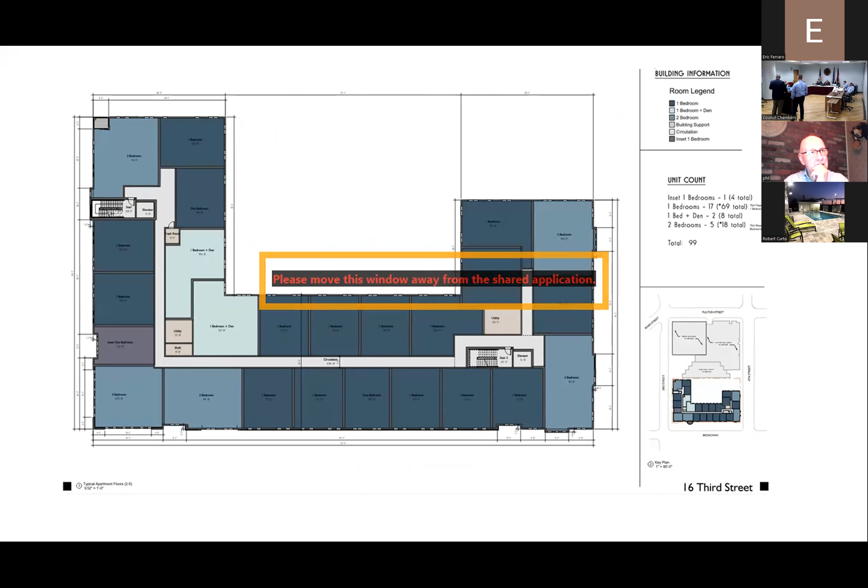This is just another view of that. Again, from the floor plan standpoint, Ken reworked the space along Broadway, and actually it extends up along Third Street as well to accommodate the farmers market in these areas. This is the same plan generally that we presented before in terms of the second, third, and fourth floors with the apartment layouts, a mixture of 1 and 2 bedroom apartments.

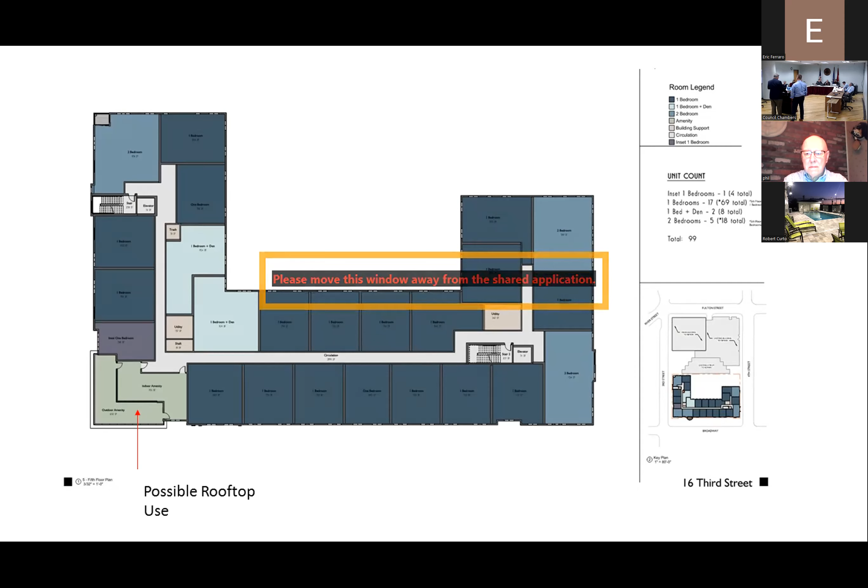And then this is the 5th floor. You'll notice that in the corner here on Broadway and Third is the possible outdoor rooftop area. It's actually shown here as a combination of both outdoor and an indoor enclosed area. That's still being played with in terms of budget and affordability, but it's something that the applicant really likes and is committed to providing in some fashion.

Again, from the enhancements along Broadway landscaping, you can see we've really added a lot of trees down in this area, kind of a performance space to go along with it, since there's usually performances with the Tri-Market. So we're talking about adding some of those spaces in here. Again, that's just surface treatment, nothing special construction-wise associated with that. And then pedestrian seating and benches along that way. But I think we really green it up from what it currently is and really engage the public in that area with the farmers market.

And I'll hand over to Ken to talk about the elevations and materials.

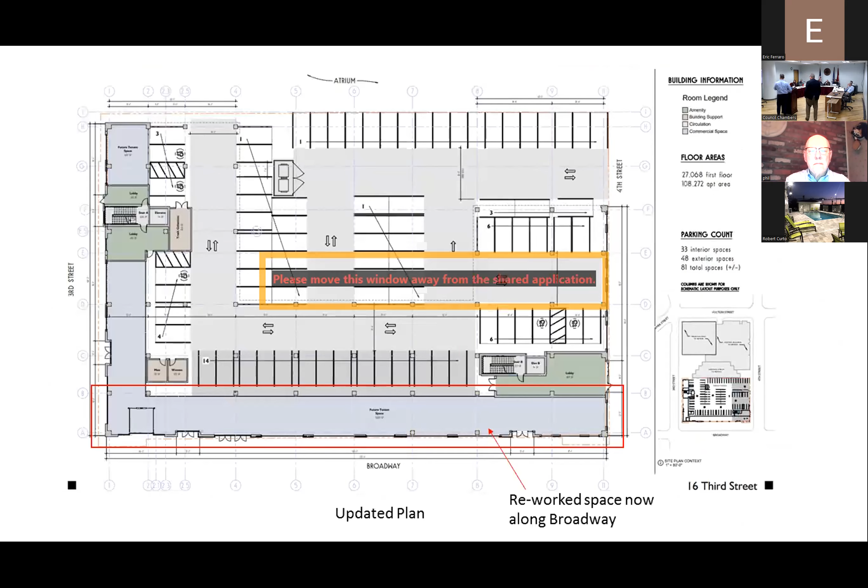So one of the things we took away from our first presentation was that nobody really liked the feel of a big building popped in the middle of the city of Troy. So we went to HRC, and after meeting with them for about an hour, it dawned on us that we really needed to break up this elevation. We said at the time we're going to make 3 buildings. We ended up actually making 4 buildings.

Then moving south, we came up with a building we're calling the Jewel, where there's a nice little decorative element on the corner with a rooftop activity space. It really helps anchor that corner. It's a modern interpretation of the materials — you have marble on the Frear building, so we have a variated color scheme of panels of grays and whites on the corner with dark bronze windows and hopefully some bronze accents.

Going to the Broadway elevation, that's what we're considering our market block type building, where all the activity of the farmer's market is really going to happen — we're hoping we can close down the street on Saturdays again. In addition, building number 4 is the one on 4th Street, and it wraps from the start of Broadway across the back along 4th Street. So that was the revised design concept versus just the one big building you saw 2 months ago.

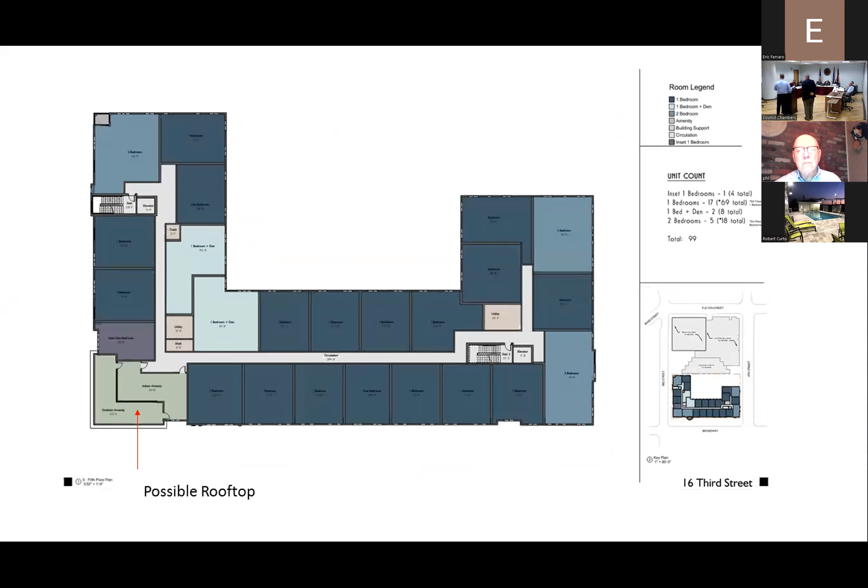It's been designed so that all the farmer's market type spaces are between you and the parking. So the only parking you really have is the entry road up in the northeast corner.

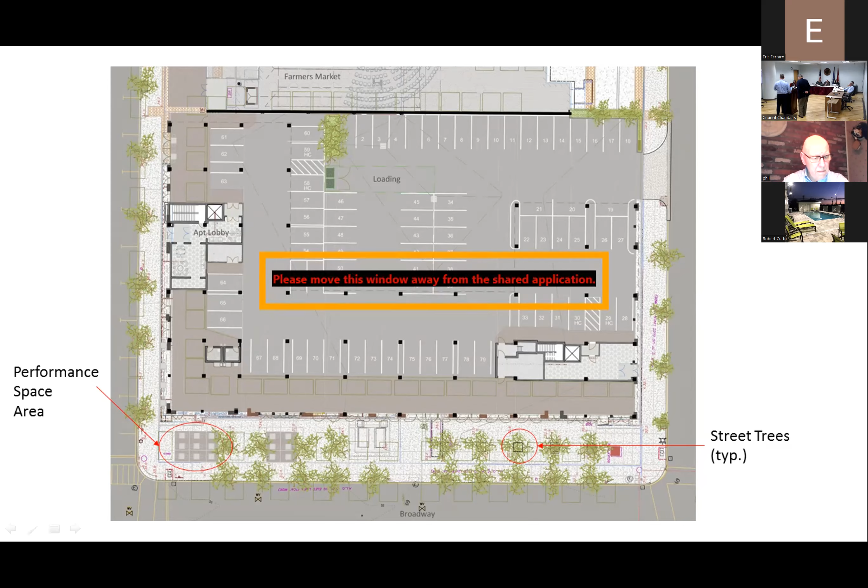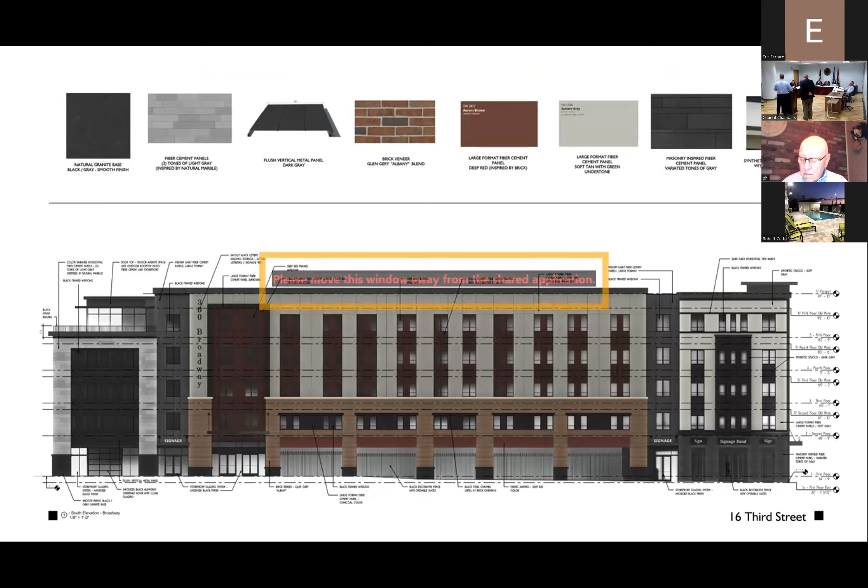So there's our market block building, building 2, the Jewel on the left-hand side. And the rooftop terrace — we're hoping, as Brian said, that we can afford it. We may need to redesign it a little bit, but right now with 99 units we're hoping we can put that in there. We like the lower elevation anchoring that corner anyway. So that's what we're shooting to do there. And you can see building 4 starting on the right-hand side of that image.

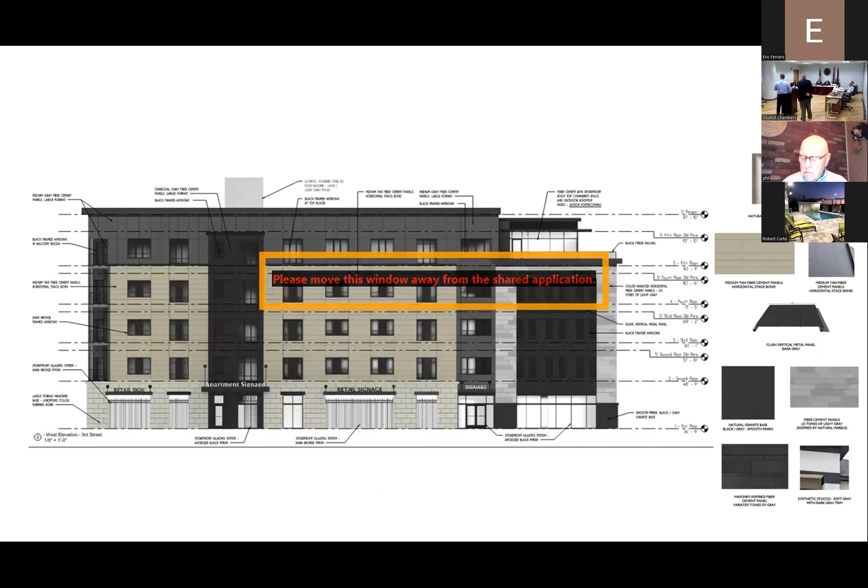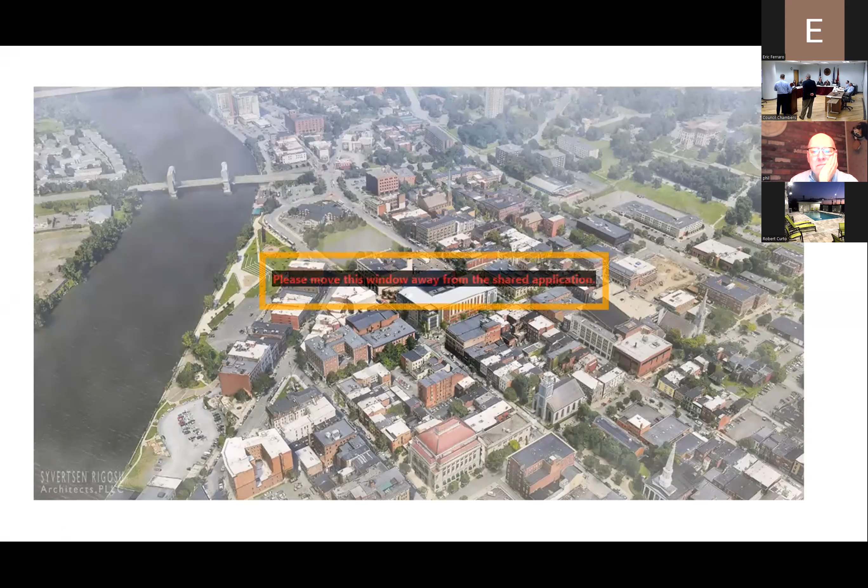Would you zoom into the center, but move it down so we don't have that yellow box overlaying the project in it? I think I remember how we figured that out — you had to share the entire screen rather than just the application, or vice versa. Well, you could also just take it out of presentation mode. Yeah, oh yeah. Fortunately. Stop sharing. Yeah.

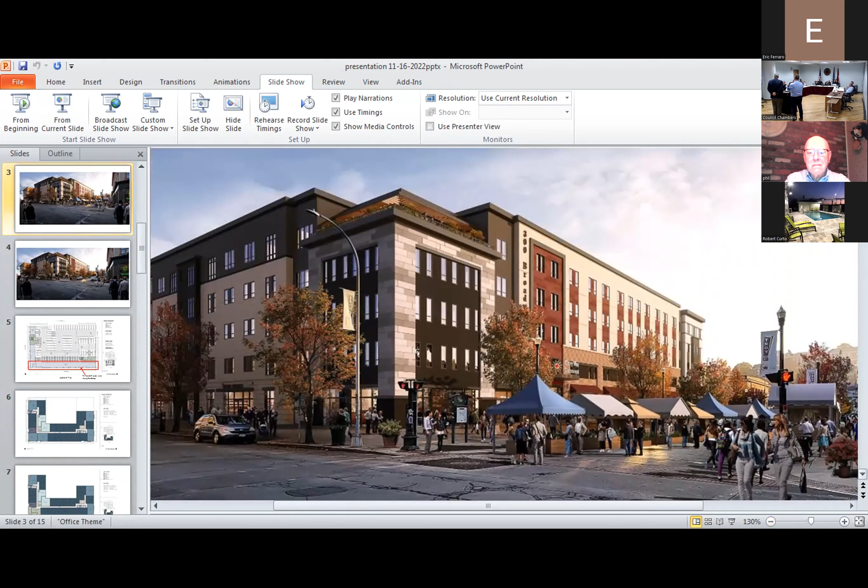The other thing I'm going to jump in and point out, something I hadn't noticed a month ago — this project now exposes... let me get the right spot. Can we go to that aerial rendering? The one we just had up? Yes, thank you. It's the south facade of the atrium.

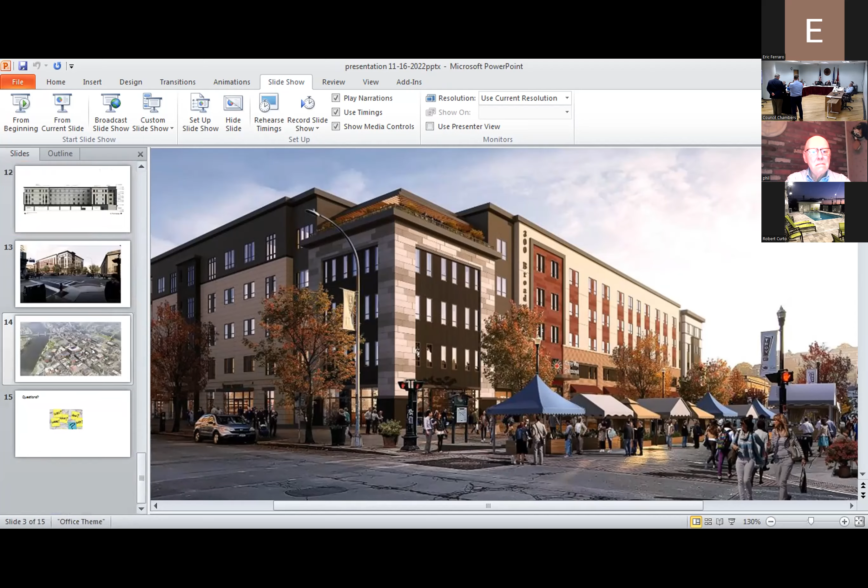The south facade of the atrium is one unrelenting facade of metal panel with nothing on it, and I think that's a concern. So that's actually on the property line. Actually, the atrium is over the property line — it's actually on our property.

But correct me if I'm wrong — you're pulling the building off of that existing wall construction. Right, so you can either leave an unfinished wall, which obviously isn't going to be acceptable, or replace the facade with something. Well, there's no wall there now — it's exposed columns. That is new wall. That's all new wall. I have to think that is not acceptable.

I don't know if any of the other commissioners or members of the public noticed that, but can we zoom into that? We talked about this in the first meeting briefly, and we didn't go into detail on it, but it was a strange thing that was pointed out, and it was a requirement.

Because of the properties — well, their argument was to put up a wall, which the city owns. But the design of what the wall is wasn't something we had discussed. Yeah, I think Brady had mentioned something about access for maintenance, or maybe Aaron did. That said, I don't think we had concluded on it — no, it's not like we're done discussing it.

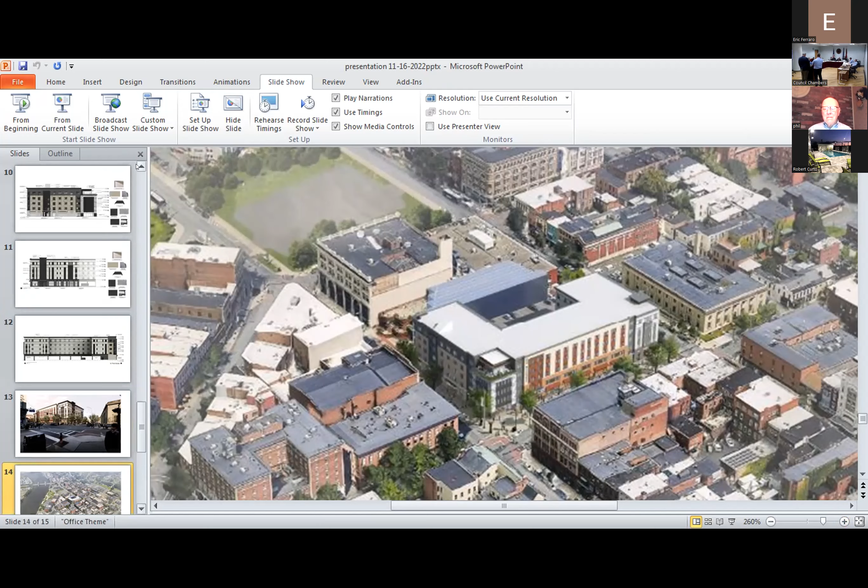What is the fabrication of those sort of bricky looking things in the corner building? Which building? The corner building—which corner? The one that wraps around Third and Broadway, the one with the roof deck. That has, hopefully, a granite or cast stone base, and then it goes to fiber cement panels above that.

Okay. I really like the way that end looks, the west edge. Yeah, this elevation is helpful. If you could just pull it or zoom in so that the elevation takes up the screen.

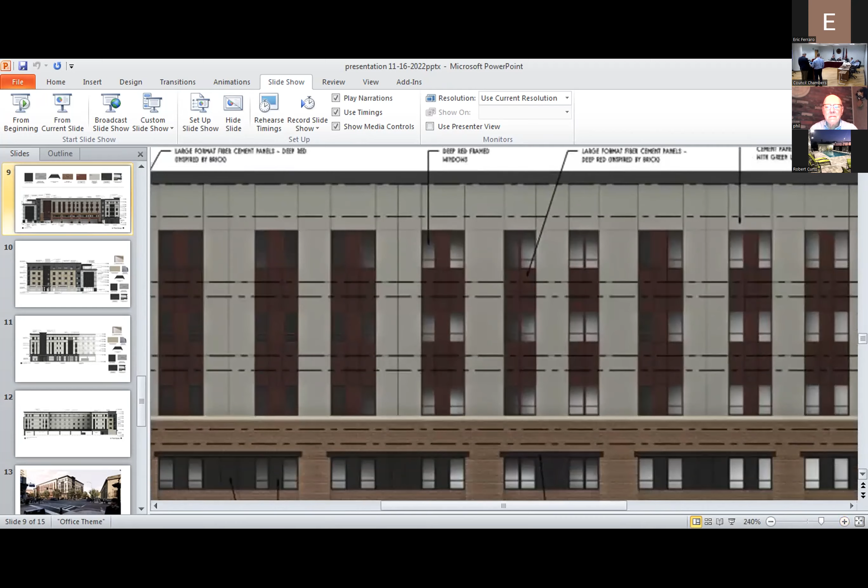So you see how there are 2 bands horizontally of brick that go across. Is there any suggestion, or does anyone think it would be better or worse without both bands of brick going horizontally? No, the bottom red, the darker red color is the awning. Then right above that there's a row of brick. Nope, below, yes, there you go, those two, that's kind of what I'm talking about. The bottom one was just your dark charcoal panel, in between the windows. Is that the same color or another shade of gray?

I would be fine if it were charcoal. So all you have in brick are these piers and this one band that is supporting level 3 and above. I feel like that might be better. Yeah, play with that, yeah.

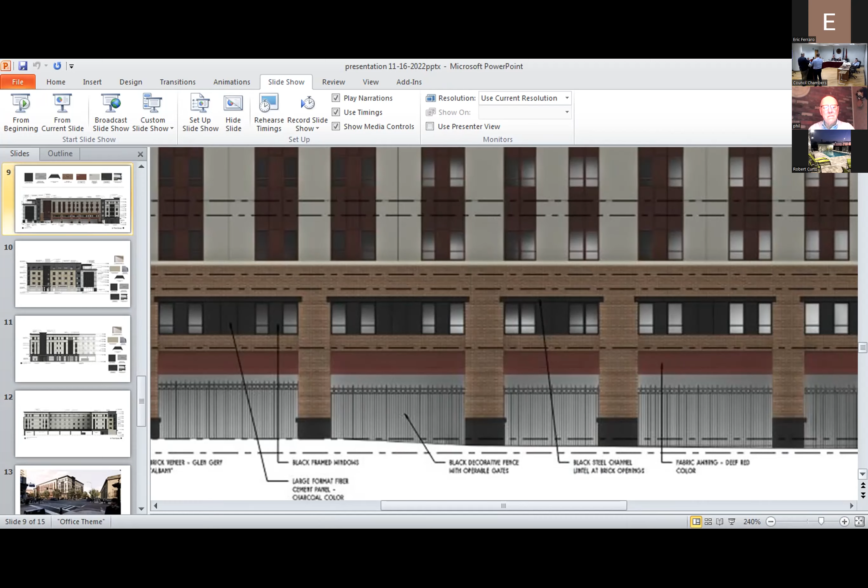I like the pedestal, and I like that it comes up 2 stories, because if we pull the view back out, I like the change in how the building moves and has some articulation in height, from the Jewel on the left to whatever the building is on the corner of 4th and Broadway. So that's really 2 things: changing the brick color, and looking at replacing that intermediate horizontal band of brick infill panel, excuse me, with something else, probably the charcoal panel.

What about the 2 bays on the left of building 3? This is a pattern we pretty much always see in new construction, where they have this one articulated pier. When I look at that, it stands out to me, because when you look at any old building in Troy, whether it's the Quackenbush or the Gurley or anything, none of them have this one pier that jumps out, the building is consistent all the way around. To me, that dates the building very clearly. And I think if we're just straight up consistent without that, without those two dark red bands, it would fit in the historical context of the city better.

I think this is more of a play on having a central arcade that goes up 2-3 stories as an entry point. I don't know about removing the horizontal brick because that may make the columns seem a little too slender at their widths. If it's 2 stories, 26 feet wide by 2 stories high, it might make the columns feel too slender.

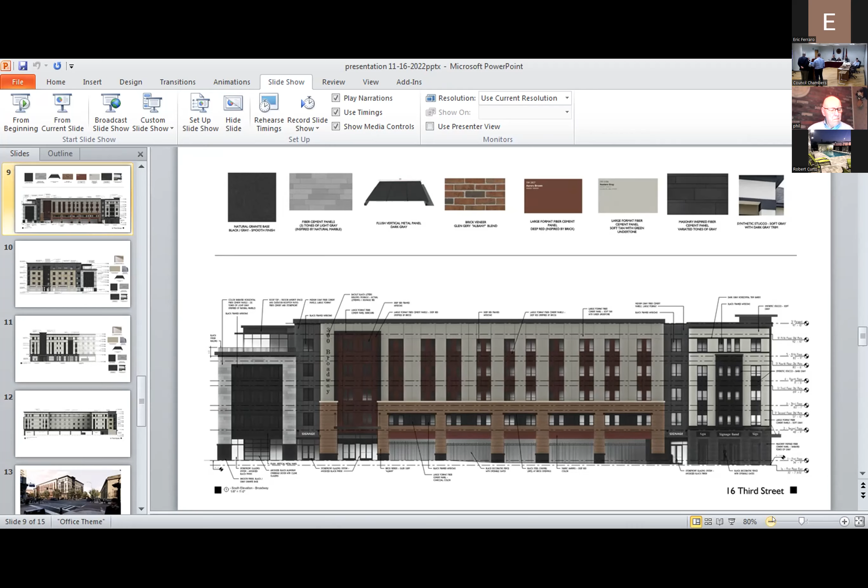The other thing I wanted to go to was the elevation on the 4th Street side, and just talk about the street activation on that side, similarly to how we've talked about Broadway and 3rd. I think there's been a lot of effort put into those streets and it looks really great.

You can see a bit from here, but also on the site plan, that the width of the parking area is still quite wide. I'm wondering if there are opportunities on the north and south sides to reduce that exposure a little more. On the north side, it looks like you could wrap the building a little further so you wouldn't be able to see into the parking area there. On the south side, this is the Fourth Street facade, there's that one parking bay as well.

Can you see into the parking area there? Right now it's all gates. I think if you could minimize that by those two bays, all the way at the northeast corner, being able to see in at that one parking stall, pulling that wall in and wrapping the building would be nicer. And on the south side, that other bay, wrapping that as well would be nicer.

Which was the south side comment? Just north of the lobby. Ideally, I'd like to see even getting rid of those two parking spaces to the right of the loading area, that would be even better. Or even just one of them, just to increase the building footprint.

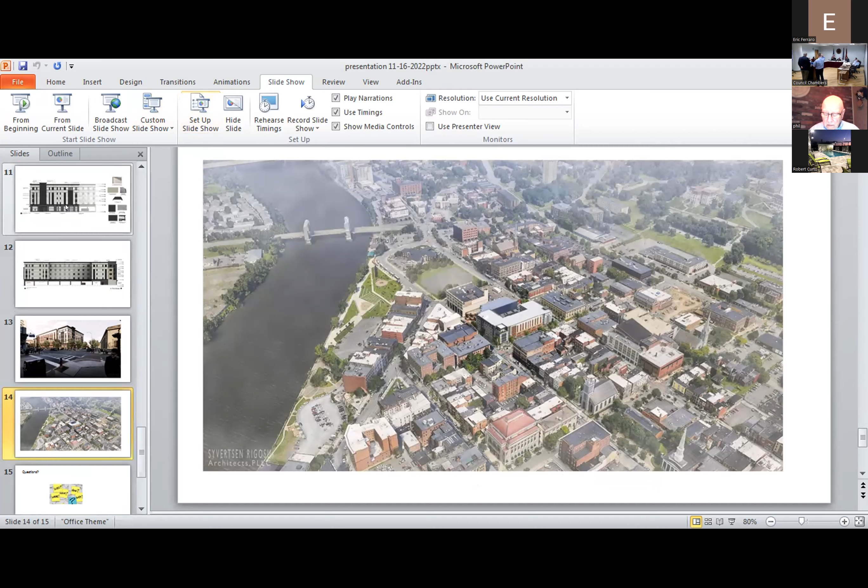It's really like a back of house that we might want to conceal, but it's not part of this work area. I understand. You don't by any chance have the old rendering from the previous presentation where you can see that whole backside, the south elevation of the atrium, do you?

Yeah, this one. But that proposed wall is what you're going to see when you're on the sidewalk at that opening to the parking area. You're gonna look past your building straight in and just see this monolithic wall - you would see this, and that would be that. Yeah, there it is. You can see the atrium is pulled back quite a distance, the red part, right? 60 feet, the red part on the right.

Just throwing ideas out there - a knee wall made of masonry or something solid, that has a bench on it, that has trees growing out of a 5-foot wide planter, or even a 3-foot wide planter, something with mass. And remember, we're getting rid of all that seating space along Fourth with this project. Just creating one little opportunity there at the break between new and existing.

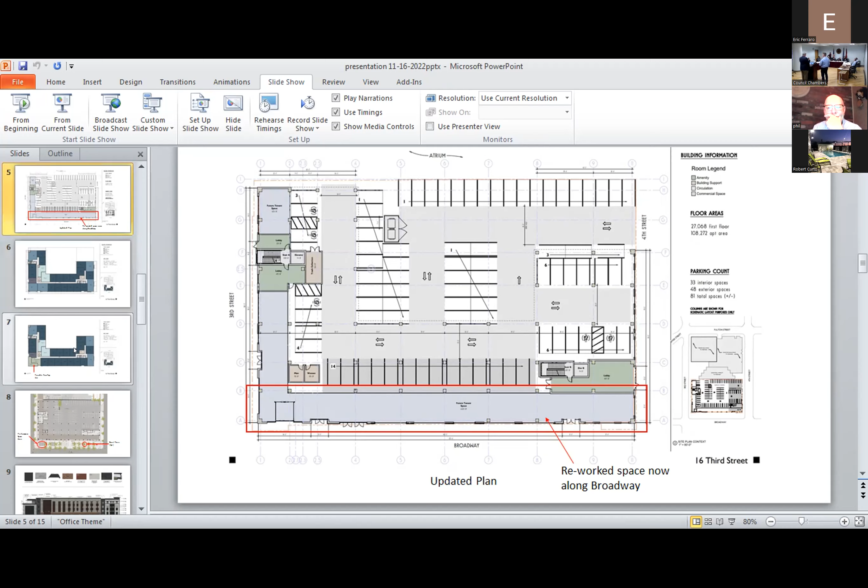Into this little recess of who knows what. Yeah, that's whatever this is, the atrium, and it is very strange. You're talking about the concrete step - the only way you can enter the atrium from the Fourth Street side.

And Sarah, I don't know if this is where you're going with it, but if you eliminated one parking space, or maybe two parking spaces, from that corner - zoom in right, you could here - open it up so this project can mesh into that.

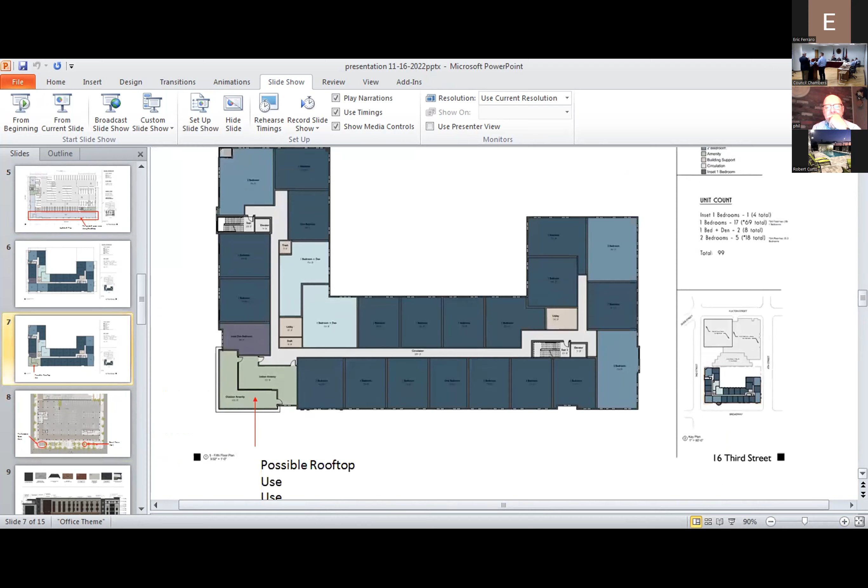If you just pull up a Google map view of it, or we can see what we're talking about - right there, top right corner. Yeah, we were proposing to do some planters as close as we can get to the property line there, just to give it a little green. You're talking about right here?

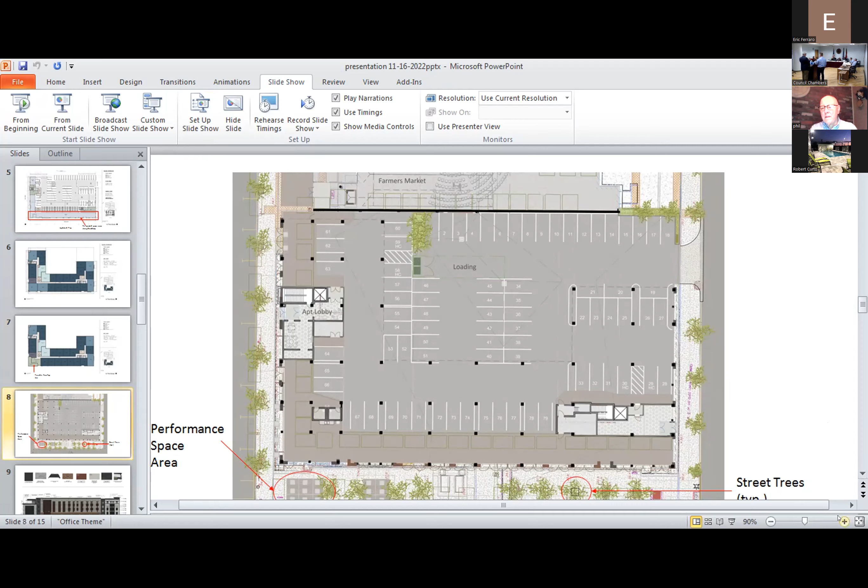Could you, by any chance, on your screen, minimize the box of guests to the other side, so we can see it, or just shift your view. Instead of having a car park - yeah, I see what you're getting at. It's fine if you can't. Maybe Eric has to do that - you don't even see those guys on the screen. Yeah, I think that's on Eric's end. You're getting the idea though, I see you're moving towards it. Yeah, it's in there.

There's a... Nope. I don't have that window though. Doesn't show on his screen. That's so funny, how complicated can we make things? Can you move it that way? Yeah.

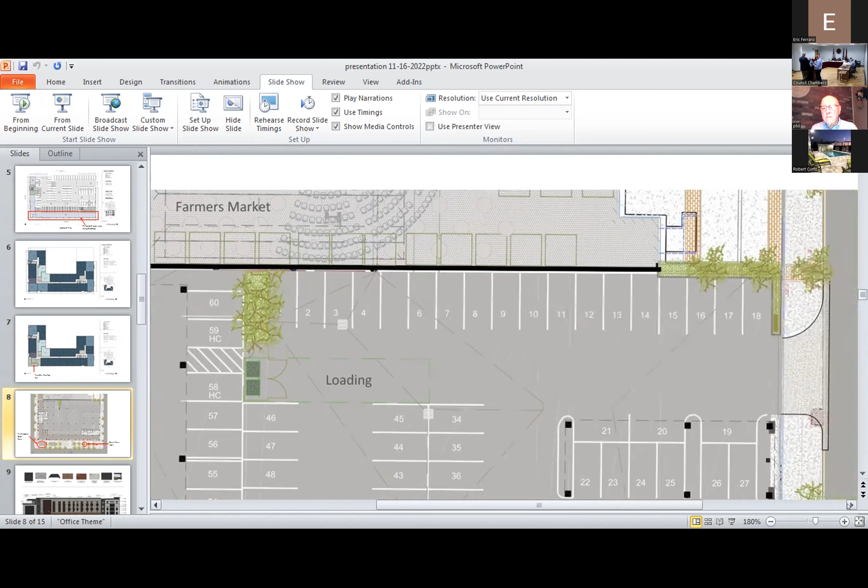Oh, I just saw a mouse appear. Yeah, yes, oh there you go. Already doing it, but maybe it's elevated.

Maybe parking spots number 18 and 17 could be open so the buildings, or the properties, interact with one another in a more thoughtful way. I know you're trying to maximize parking, but having people drive up into spots 15 to 18 and park there, when you're walking down Fourth and looking at that, I think it's going to look bad.

Those green strips need to have mass to them, and they need to have vertical height. They're meant to be planters, 5 feet high, or 3 feet high with something growing out of them. Yeah, we'll break that up.

Could you find a way to make them 10 feet tall? You don't want them 10 feet tall. A green wall? Not the planter, but a green wall. Oh, a garden wall? Have trees and stuff. A living wall, sure. Good word, I think trees would be nicer - something just to give it height. Yeah.

I think a 4 to 5 foot high planter with trees coming out of it is going to block the view of the cars for the most part, it'll get the job done. Good, let's move to - I'd actually like to look at the Third Street elevation if we could.

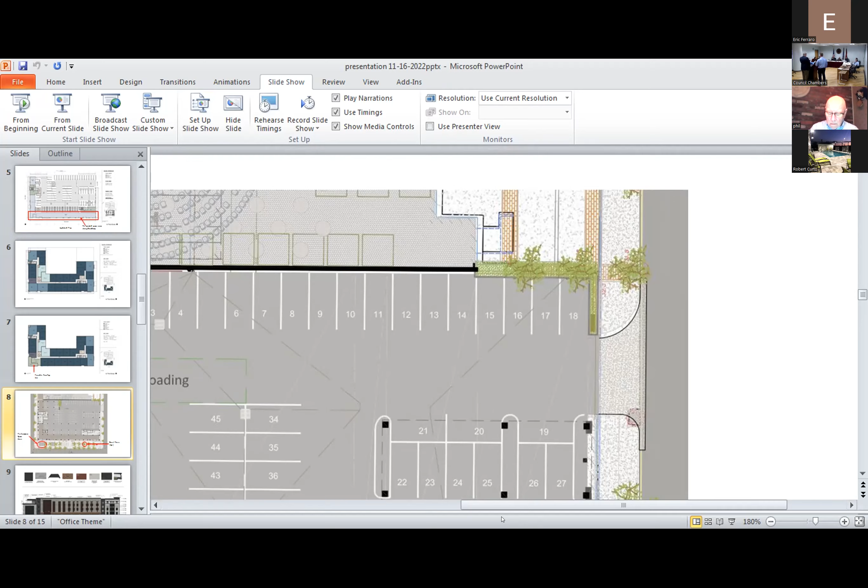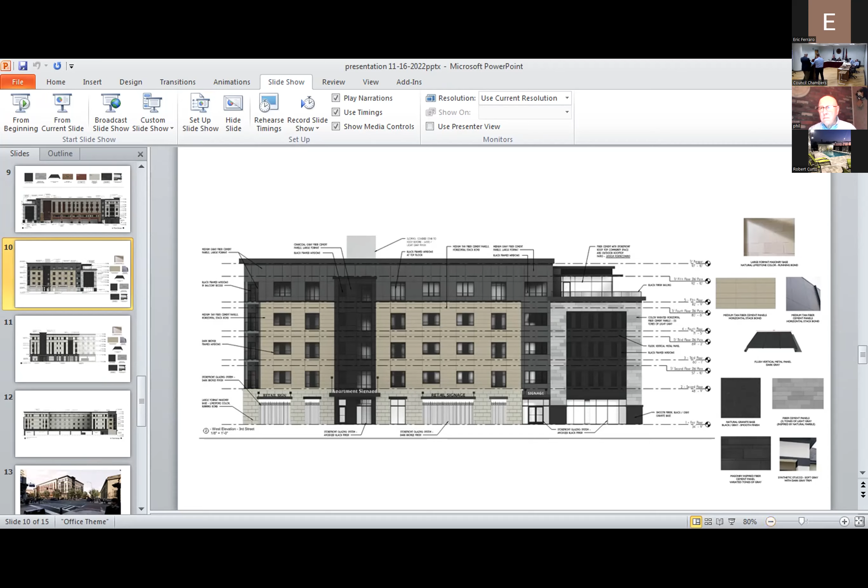The fenestration, or the banding that separates the first story from the stories above - it could just be the way it renders out, or perhaps the overlap of the story's hashed or dashed line that makes it blend more. But I personally think adding a little more mass to that band would give it some more historical heft and weight. This band here is what I'm talking about, this white band.

You're saying you'd like to see a water table on the transition between the stone and the fiber cement. Yes.

Maybe that's just my two cents. Curious what the other commissioners think. Where were you referring to, Roddy? So on my screen...

Yeah, just to see a running water table there. That's no problem, there's already a band there - I'm almost thinking you just make it wider. See that? Yeah. It runs across the length of, or down parallel to, Third.

On either side of this, is this the jewel? Yep. Is that what you're calling this? On either side of it there's a strip where the building's recessed. Yep. Is there an intention or function to that recessed strip? Not really, just to break up the facade. To me, it looking like three buildings is great, but when those recessed strips are added, it looks like three buildings and two halves of other buildings shoved in between them. We've talked about this with other projects in the past - sometimes I don't like it, but this one I do, I think it makes sense here.

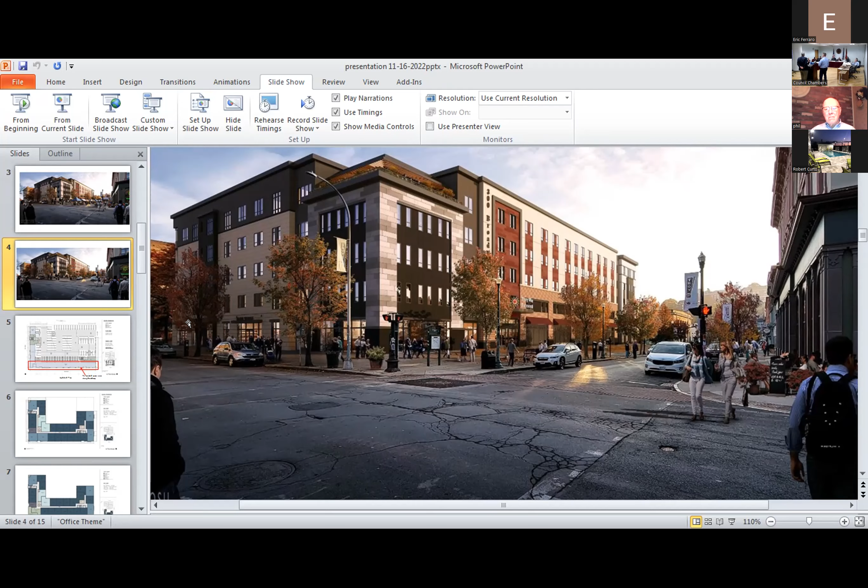I think we should spend a little bit of time talking about the street rendering shown in our presentation materials, on page 3, which shows some booths. I wanted to ask how these relate to where the sidewalk exists now. Is this just inboard of where the curb line is right now?

These are actually out in the street if the street was closed down for some kind of event where you would close the street. So those would be temporary stalls that come in and out.

During an event, I was thinking about this project and pondering the idea of somehow using the sidewalk space to have stall spacing, figuring out a way to do a covered space, almost like a passage—not a tunnel, that gives the wrong impression—but like a bazaar or market space that goes between 3rd and 4th, connecting you like an arcade. Doing something similar where you had that sort of opportunity on the sidewalk space creates almost an open air market for people to go through. It's not really constructive criticism, just something to float by you.

But from our standpoint architecturally, do you have to go back to the HRC with those changes? Probably, I don't know. Well, if we were to recap the requested information: adding a thicker water table on building number 1, making the brick darker on building number 3. We already have the planters—maybe we could show the height of the planters on the 4th Street elevation.

What do you mean by revisit it? I could go either way. Oh, well, we have the 2 roll-up doors. Right, but replacing the gate with roll-up doors everywhere? At least on Broadway, yeah, in the vendor spaces, so that they're not open pits of different activity when the market's not there. But they want the gates, sure. Yeah, that's what the farmers market wanted, but we can have that conversation.

Okay, great. And then the big elephant in the room is that facade on the south edge of the atrium space that we tabled discussion on. Something has to happen—that's right on the property line, so it's going to need a 3-hour firewall. It can either be solid masonry or a fire-treated panel.

Masonry, you're looking at $20 to $30 a block. That's the cost of the masonry for that big wall. So it's a firewall, on the property line.

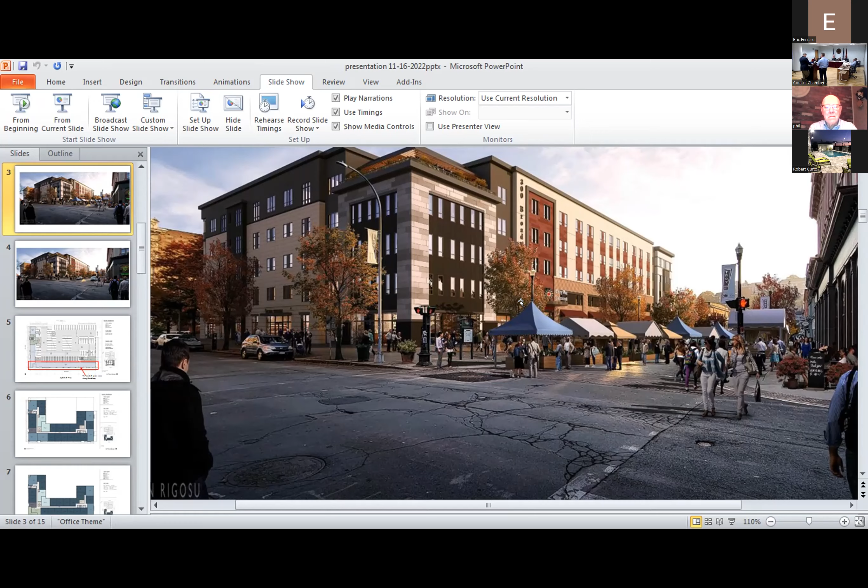I actually really like the 4th Street one, I think. I'm not exactly sure. Yeah, I didn't either, I thought they had it up for a second. Yeah, it wasn't really in our packet.

What is the wall construction that's providing the 3-hour fire resistant rating? It's the insulated metal panel - Clear Span makes a 3-hour rated panel. So it's got insulated, cementitious material in it? Well, no, it's polyurethane that's fire treated.

That sounds like a really environmentally friendly material, doesn't it? We have never used that before. Yes, you're out of luck.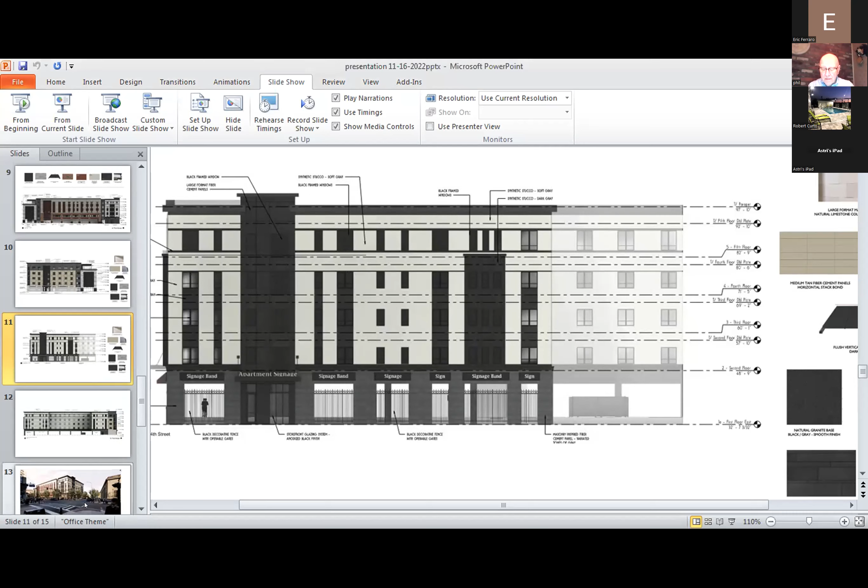What would be creative, and another thing that we haven't discussed, is transportation accommodation for other modes as well - having some sort of safe and secure bike parking, and any sort of program that might take place to encourage folks to take transit. I know CDTA offers a universal access package that they team up with developers and offer to tenants.

That's a comment that we received from CDTA. That's what I'm saying. But yeah, having indoor bike parking, or at least sheltered bike parking, I think would be good. Is that shown on the plans?

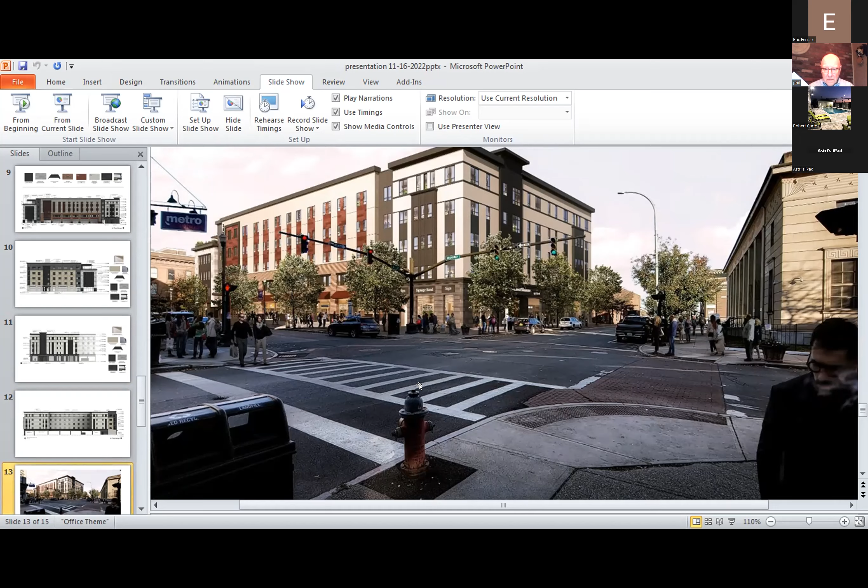I have the same comment as the other facades - the one strip that sticks out. In my preference, it would go away and it would be a consistent building like elsewhere.

You're talking about on Fourth? Yep, the tallest section. Well, what's going away? Well, I think on this elevation specifically, it's more of an outlier, it doesn't really fit in.

That's the entry point for the apartments. Right, I understand the visual cue to show where the entry point is, but I think it sticks out in a bad way. If it were more subtle.

What if you got rid of the dormer or whatever that is? On the left or right? We're just trying to break up the expanse of the building.

Something to think about. Perhaps a softer color. I like that it breaks up the length, but maybe it's jarring because it's such a contrasting color.

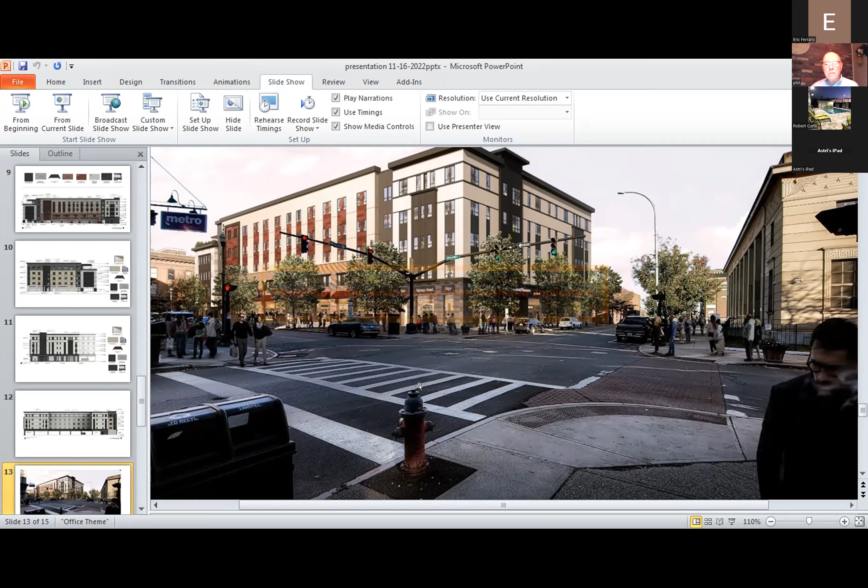Okay, that's all we had on old business. So we'll move to the couple items from consent that were moved to new business. Start with PLPC 2022-103 for 908 River Street.

Is the applicant present for that project? Yes, 908. Hello, you can come on up. Come on up. Yep, please come up to the podium.

I'm the attorney for the applicant, and I'm present virtually as well. Okay, if you wouldn't mind, they have to state their name for the record, or name and address for the record please. Philip C. Miller, attorney at law. Computer Drive East, Albany, New York, 12205.

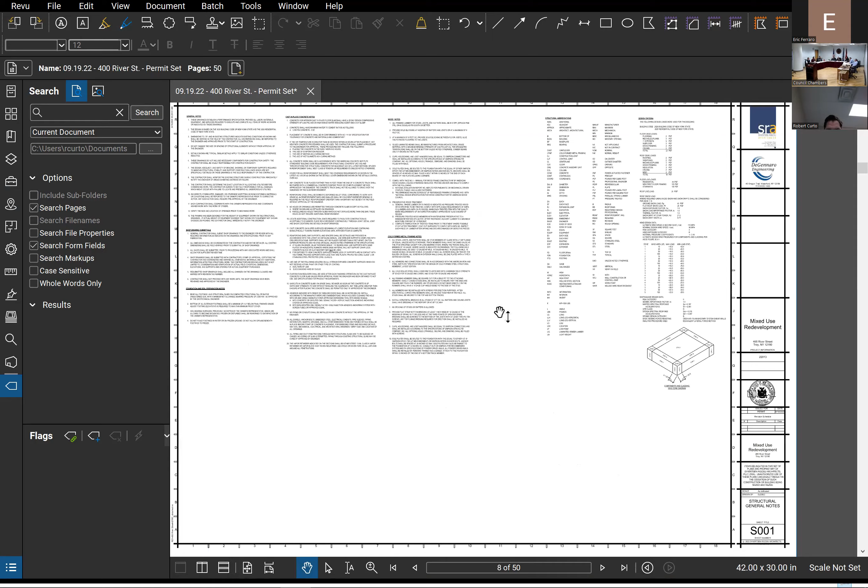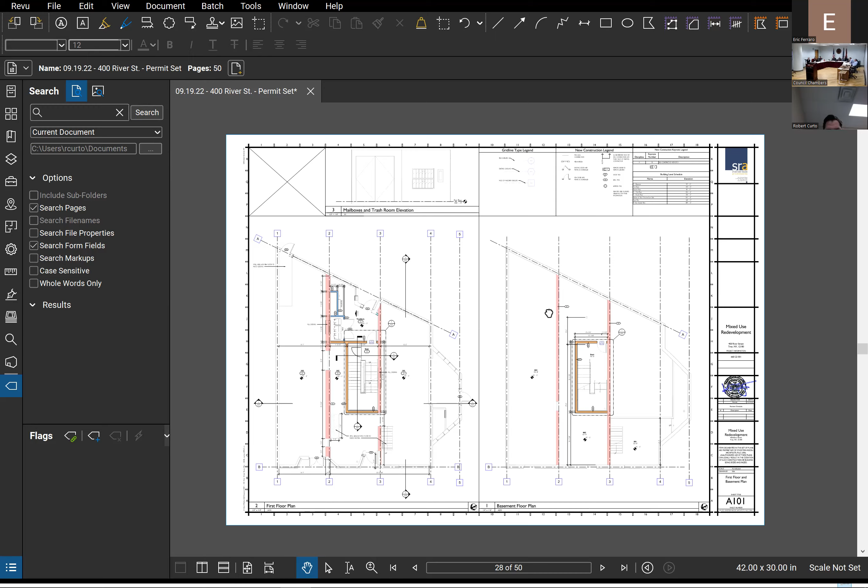I love this building, I hate that little thing. Really? I really do. I was just wondering if that was something that was going to stay. Never mind. I think it gives it some character, but that's just me. I'm just thinking of what was there before, I've seen postcards of it. My understanding is historically they took down the front of the building, the bank or something, and sheared it off at the corner.

But that is a pretty functional little area for an entryway for the first floor space. I don't feel this change is significant enough for us to need to review it as a group again. I don't know if anyone else feels that way. Agreed, agreed. I can volunteer to review it myself, or city staff is probably capable of reviewing it too.

No, I appreciate that guys. I think what I will do is bring that request back to the property owner, because I think there is some merit and value there to doing something like that. I like the idea of putting a little planter in the half moon.

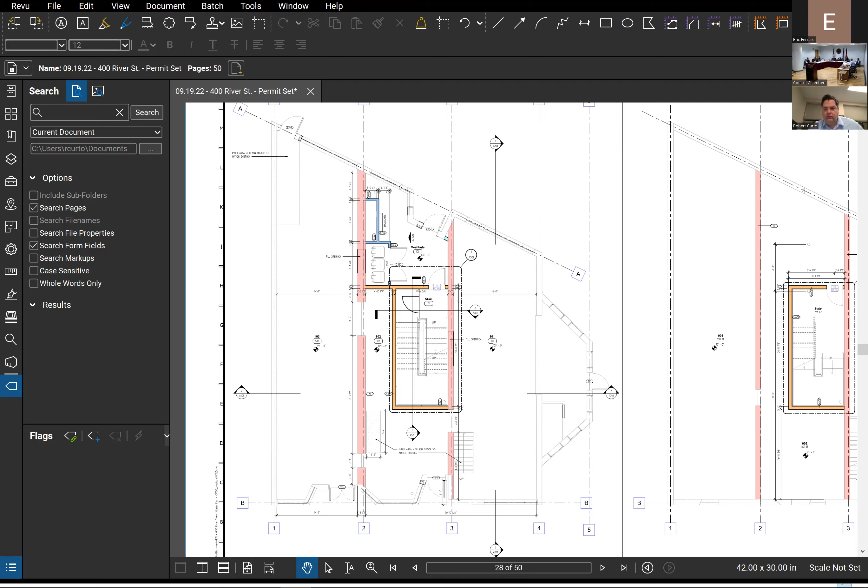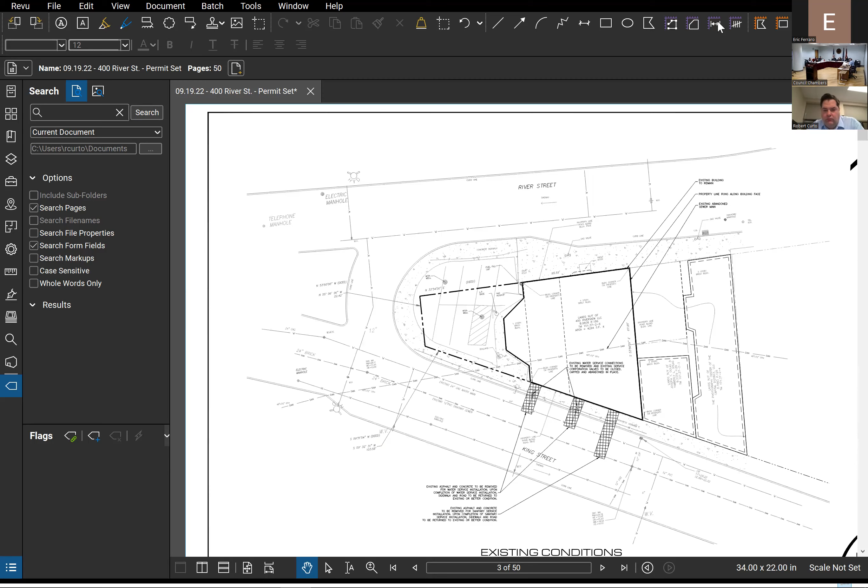So action-wise, do you guys want to make a motion for me? I'll make a motion to approve this project with the condition that there's a 3 to 4 foot high knee wall planter in this semicircle space to the south end of the project area, understanding that it has to be approved by the city as well.

Yeah, because if we don't get approval by the city, our hands are tied. We understand. I'll second it. Moving to a vote, all in favor? Aye. 6-0.